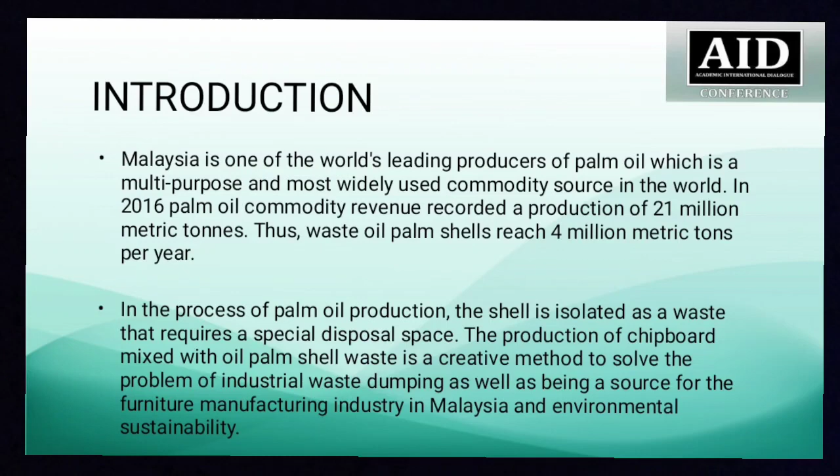The production of chipboard mixed with oil palm shell waste is a creative method to solve the problem of industrial waste dumping as well as being a source for the furniture manufacturing industry in Malaysia and environmental sustainability.

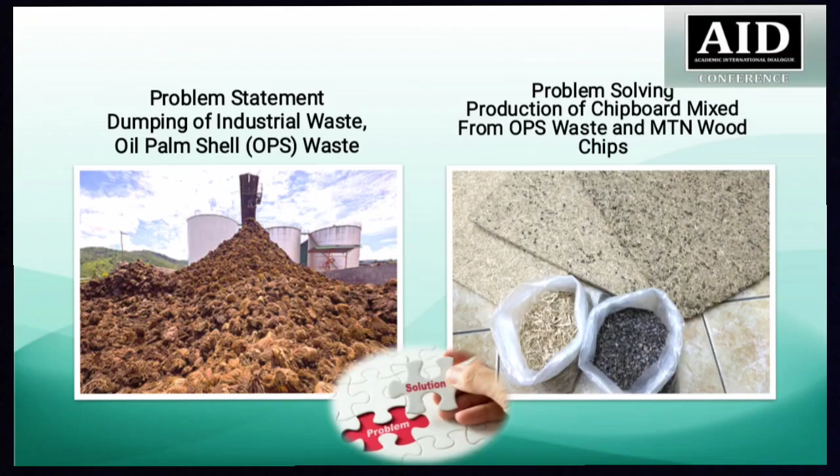The problem statement for this study is the dumping of industrial waste, which is oil palm shell OPS waste. As we know, Malaysia is one of the world's palm oil producing countries, so it is not strange if Malaysia faces problems such as agricultural waste, especially in the processing of palm oil. So, the problem solving is the production of a chipboard mixed from OPS, oil palm shell waste, and MTN, Meranti Temak Nipis, wood chips.

The objective of this study was to produce chipboard mixed with oil palm shell waste, OPS, and Meranti Temak Nipis wood chips, MTN. This study was also conducted to test the bending strength MOE of the standard chipboard with a chipboard residue mixed with oil palm shell OPS and Meranti Temak Nipis MTN wood chips.

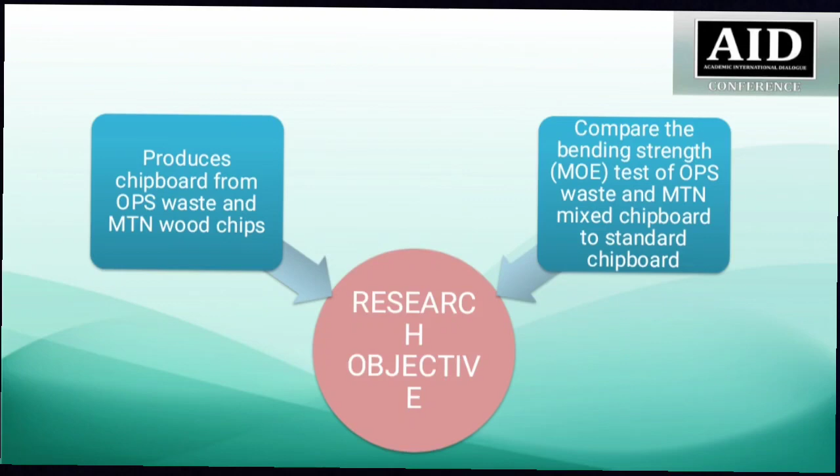This is to determine whether the oil palm waste is suitable as a mixed material in the production of chipboard, or the oil palm mixed chipboard produced can be one of the materials in the manufacture of furniture, as well as an innovative product in the furniture industry.

The scope of the research is to produce chipboard mixed of OPS, oil palm shell waste, and MTN, Meranti Temak Nipis wood chips. The size of the panel produced is 340 x 340 x 12 mm. Sample size is 290 x 50 mm x 12 mm. The bending strength test MOE, or Modulus of Elasticity, is according to BS EN 310-1993.

The ratio of OPS, oil palm shell waste mixture, and MTN, Meranti Temak Nipis wood chips is 70-30 and 50-50. The study period was 10 months, which is from December 2019 until October 2020.

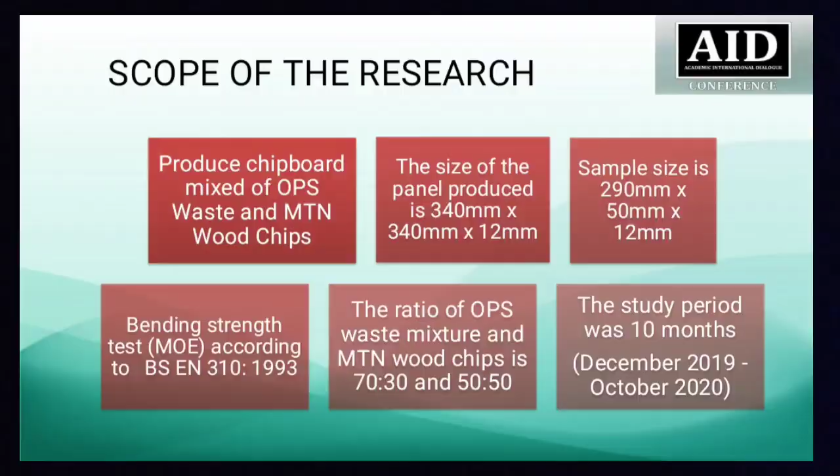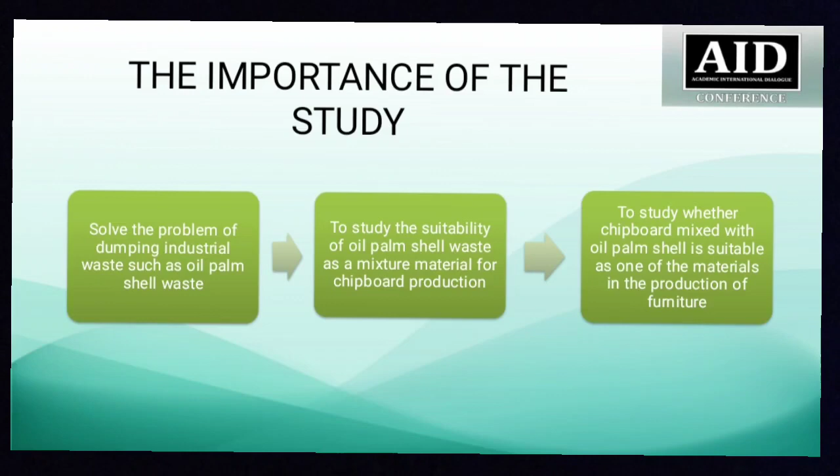The importance of the study: first, solve the problem of dumping industrial waste such as oil palm shell waste. Second, to study the suitability of oil palm shell waste as a mixture material for chipboard production. The last one, to study whether chipboard mixed with oil palm shell is suitable as one of the materials in the production of furniture. Okay, so let's continue with the literature review.

The materials that we use are Meranti Temak Nipis wood chips and oil palm shell waste. First, Meranti Temak Nipis, MTN wood chips. Meranti Temak Nipis tree, or its scientific name Shorea roxburghii, is a native rainforest tree. The size of wood chips that we use is supposed to be from 0.06 until 1.18 centimeter. This plant can adapt to both dry and moist soil.

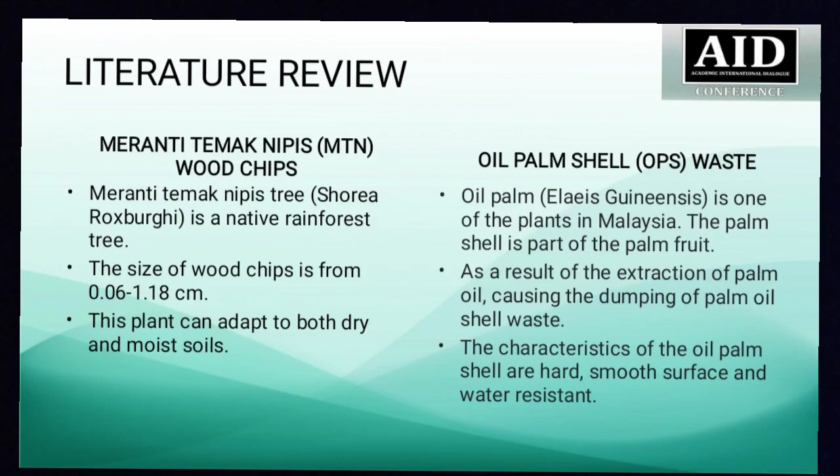For oil palm shell OPS waste, oil palm, or its scientific name Elaeis guineensis, is one of the plants in Malaysia. The palm shell is part of the palm fruit. The extraction of palm oil causes the dumping of oil palm shell waste. The characteristics of the oil palm shell are hard, smooth surface, and water resistant.

Now I'm going to tell about the chipboard production process. First, the oil palm shell is crushed using a crusher machine. Second, the oil palm shell and wood chips are placed in the oven to dry for a day. Third, the dried materials are weighed according to the percentage calculated.

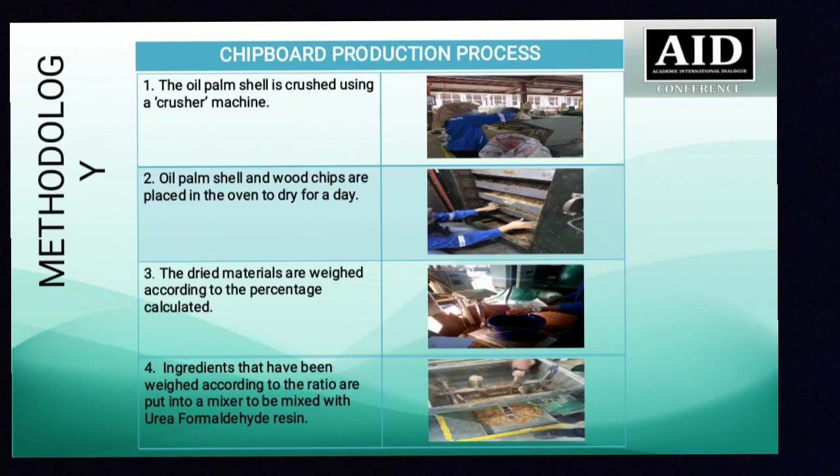And fourth, ingredients that have been weighed according to the ratio are put into a mixer to be mixed with urea formaldehyde to make sure it's all glued. Fifth, the ingredients that have been blended are put into a 340 mm times 340 mm times 12 mm formwork.

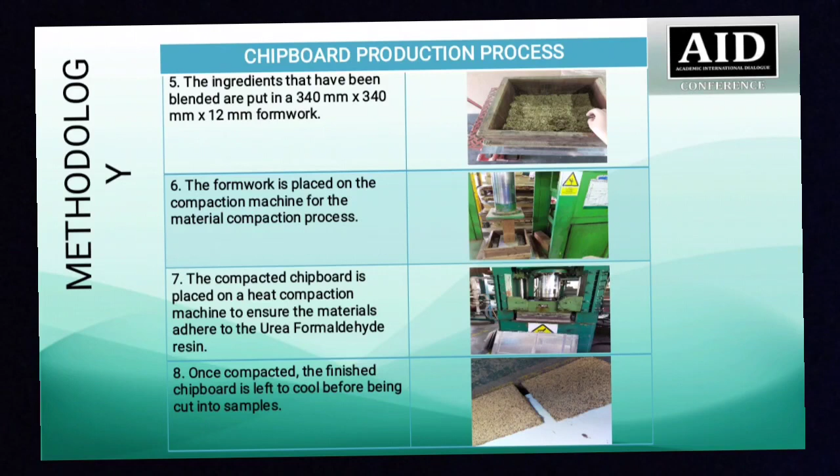Sixth, the formwork is placed on the compaction machine for the material compaction process. Seventh, the compacted chipboard is placed on a heat compaction machine to ensure the materials adhere to the urea formaldehyde resin. And last one, once compacted, the finished chipboard is left to cool before being cut into samples.

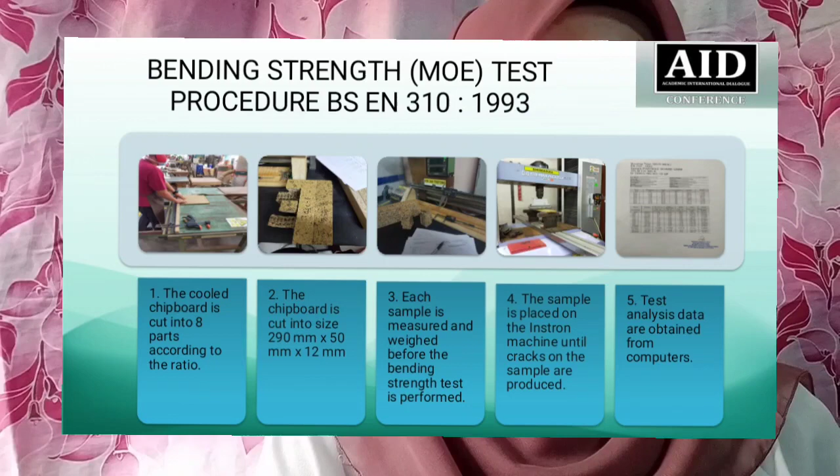After that, the sample is placed on the Instron machine until cracks on the sample are produced. The test analysis data were obtained and recorded by the computer, and the test procedure was repeated for each test sample.

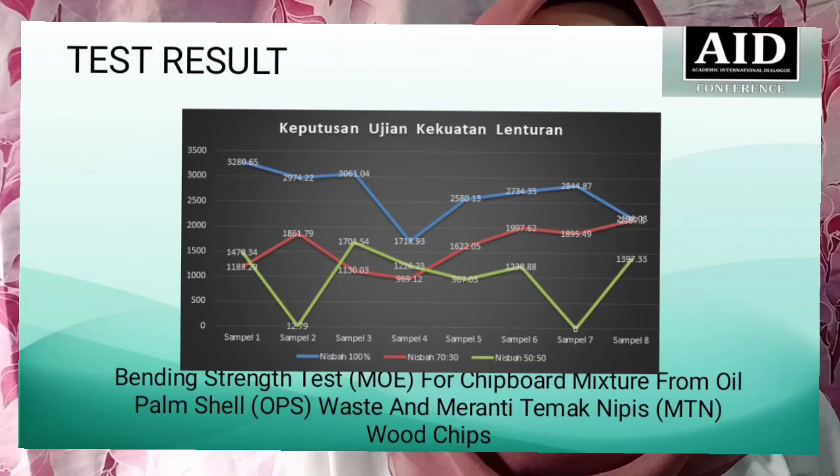The bending strength test result is according to the standard BS EN 310-1993. The bending strength test is determined based on the cracking rate of the chipboard through testing using an Instron machine. The result of bending strength test MOE must reach more than or equal to 1800 MPa.

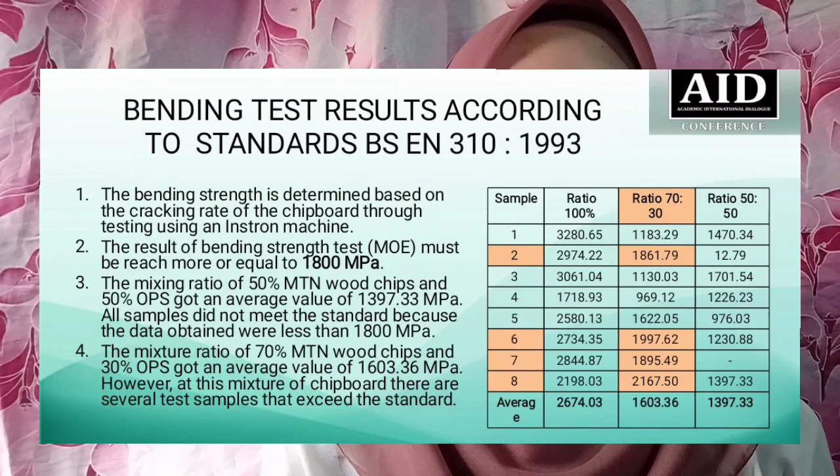The mixing ratio of 50% MTN wood chips and 50% OPS got an average value of 1397.33 MPa. All samples did not meet the standards because the data obtained were less than 1800 MPa.

The mixture ratio of 70% MTN wood chips and 30% OPS got an average value of 1603.36 MPa. However, at this mixture of chipboard, there are several test samples that exceed the standard. As you can see in the table at the right, there are several test samples of the 70/30 ratio that exceed the standard.

Among the samples that passed the standard was the second sample with a value of 1861.79 MPa, then the sixth sample with a value of 1997.62 MPa, then the seventh with a value of 1895.49 MPa, and the last one, the eighth sample with a value of 2167.50 MPa.

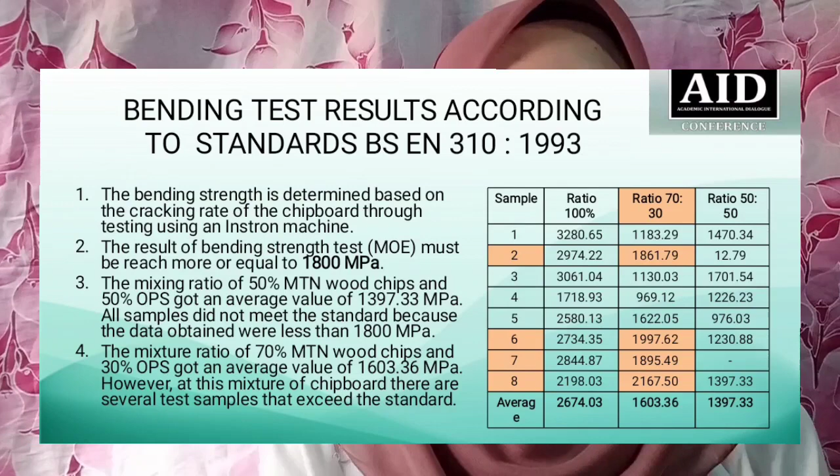The main objective of this study is to make chipboard from a mixture of wood chips and palm shell that aims to reduce the dumping of palm shell waste produced from the palm oil industry.

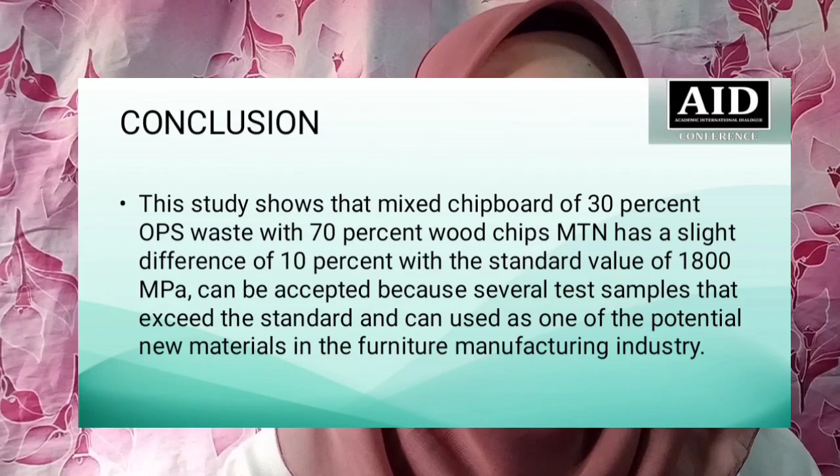For the conclusion, this study shows that mixed chipboard of 30% OPS waste with 70% Meranti Temak Nipis wood chips has a slight difference of 10% with the standard value of 1800 MPa. It can be accepted because several test samples exceed the standard, and it can be used as a potential new material in the furniture manufacturing industry.

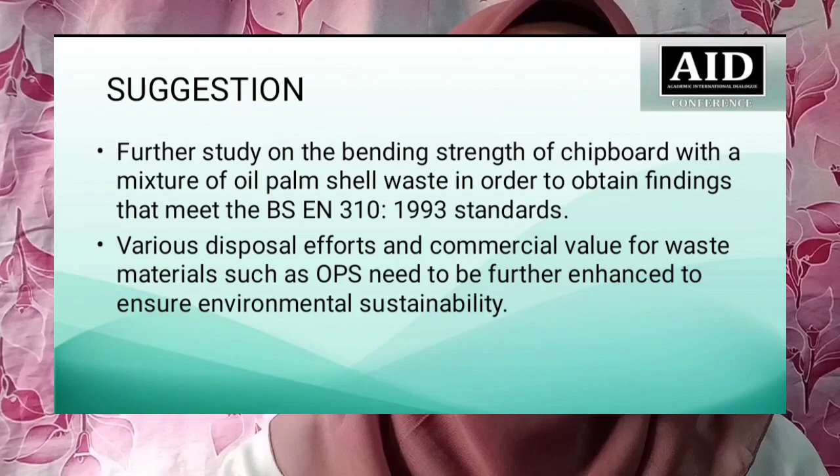Last one, the suggestion from this study is to further the study on the bending strength test of chipboard with a mixture of oil palm shell waste in order to obtain findings that meet the BS EN 310-1993 standards. Various disposal efforts and commercial value for waste materials such as OPS need to be further enhanced to ensure environmental sustainability.